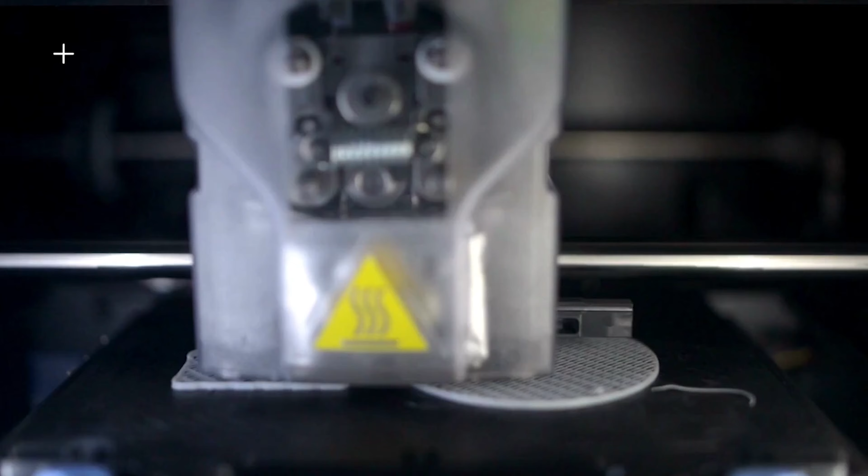I decided to choose this particular capstone because I love the fantasy genre, whether it's movies or books. I've always been fascinated by armor and warriors because my family and I have been going to Ren Fairs ever since I was, I believe, 3 years old, so it's been a part of my life for a very long time.

When I got older and started writing myself, I realized I wanted to create a trilogy based on the fantasy genre. With that, as with any other book, comes a lot of notes for culture, religion, and just design aspects of every type. I've always wanted to turn what I had book-wise into something physical.

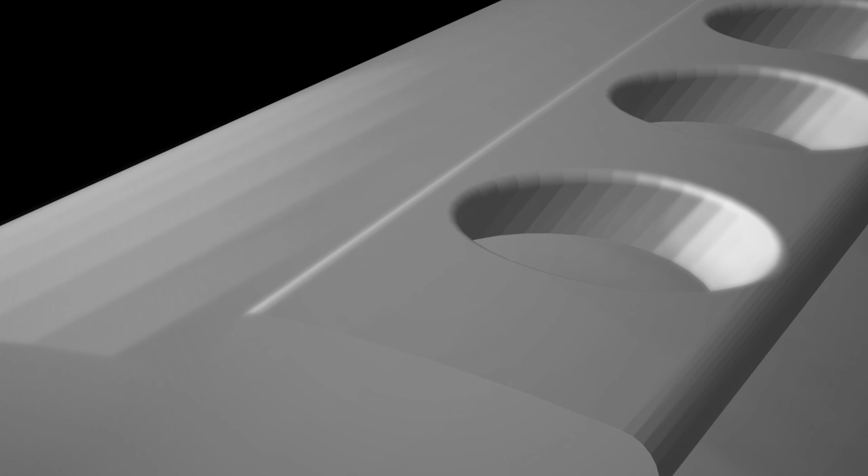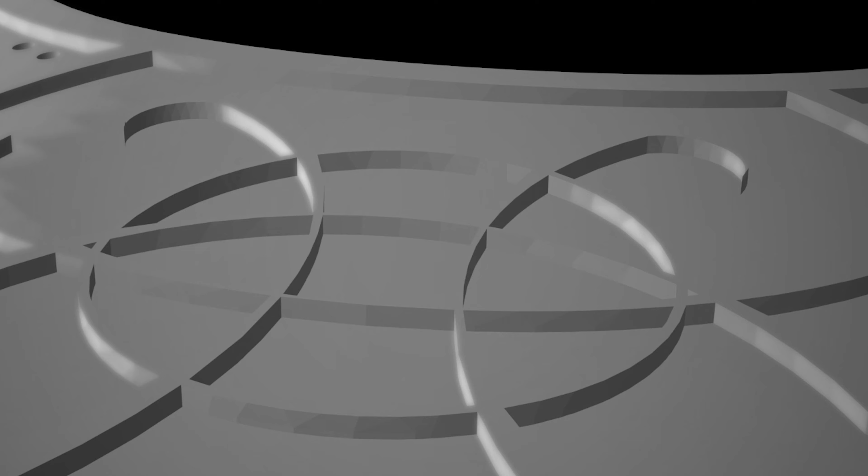So I decided to try and test my skills with 3D modeling and 3D printing, to design this and see if I could really make it into a costume that I could meld my writing, the fantasy genre, and going to Ren Fairs all together into one singular piece. That's how I really decided I wanted to do this, and I'm very happy with how it came out. The following steps will show you how I managed to do this entire process throughout the year.

The first stage I went through for this process was the sketching stage. This is where I came up with the basic concept of what it was going to look like, and I did this using Adobe Photoshop. This can be done through any type of drawing software.

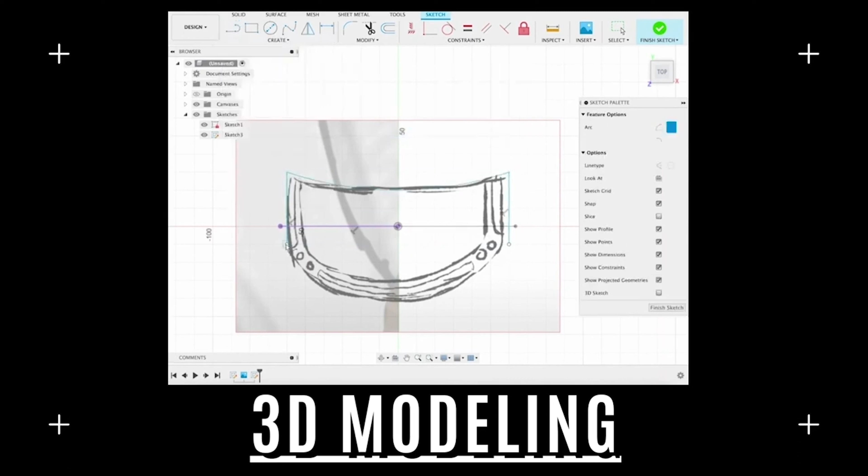Then I took that image and imported it into Fusion 360, using an educational license to be able to use this for free. I just used the sketch itself to place the lines and the circles and any details that I wanted to incorporate.

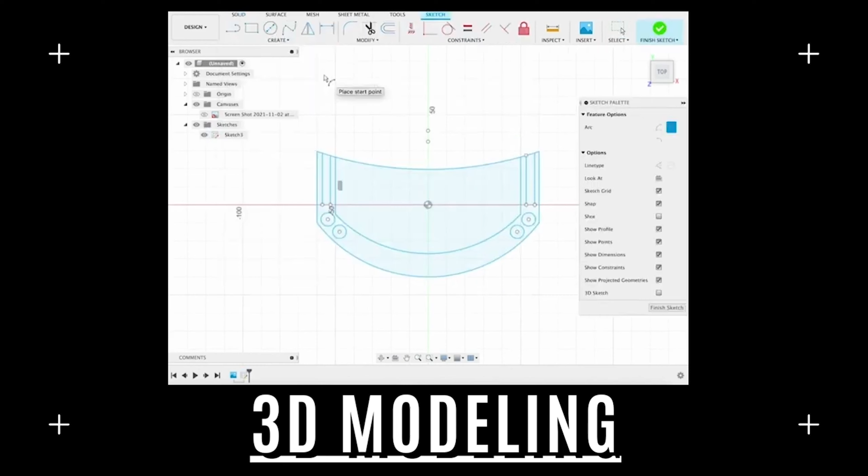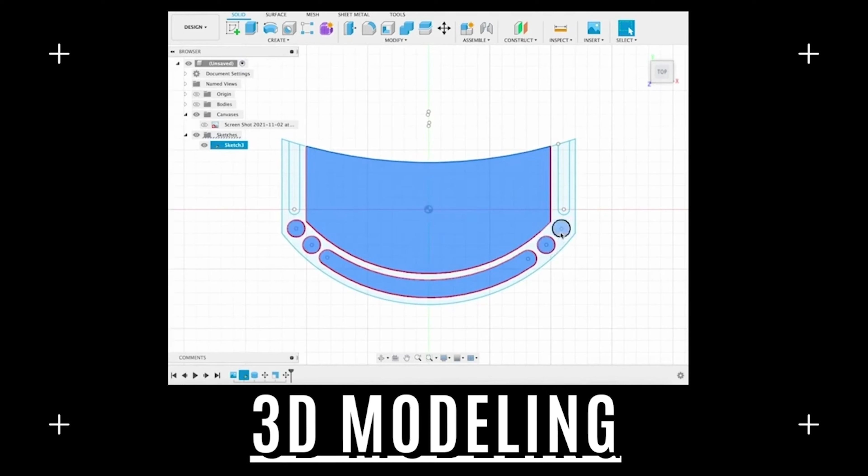Once I finished the initial sketch in the 3D modeling software, I created a cylinder, which would be the object that I extrude the sketch itself from to create the 3D model. The cylinder is just large enough to match the curvature of whatever body part this particular piece is for.

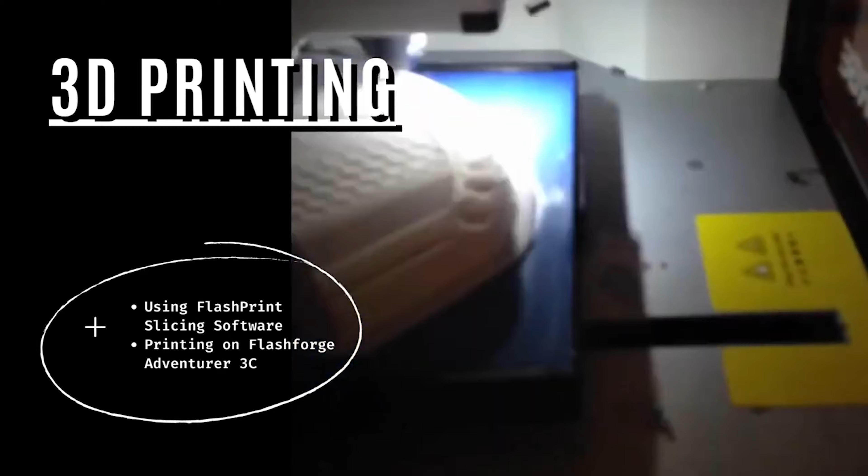The next stage is the 3D printing stage, which I used my FlashForge Adventurer 3C FDM printer.

The next stage is the priming and painting stage. I used Flex Seal, which is liquid sprayable rubber, and covered the prints in that to give an even painting surface and get rid of the layer lines that would normally show up. I also used FolkArt acrylic paint to get these colors, and a liquid gloss medium mixed with water to create this dripping paint look that you see in this video.

After the painting stage, once everything had dried, I used leather and metal pins and brads to put everything together. The hexagonal mesh was not my own 3D design—I did 3D print it, but I was not the one that made the model. I found it on a site called Thingiverse, created by a user named DaVinci85, so that is all his work. I was just the one that printed it and used it to add to my armor, so I cannot take credit for that design itself.

Overall, the entire process took anywhere from 300 to 400 plus hours of work.